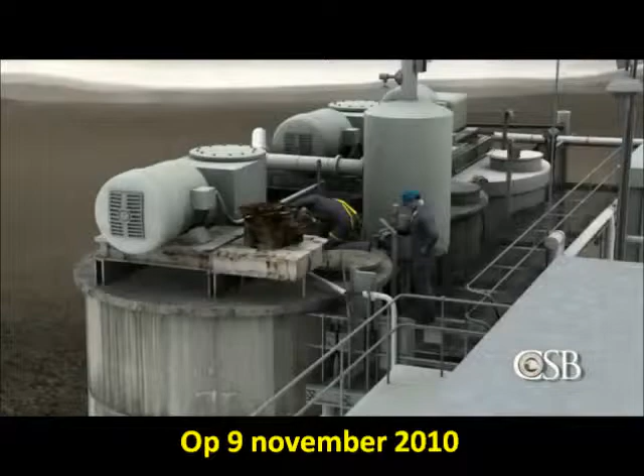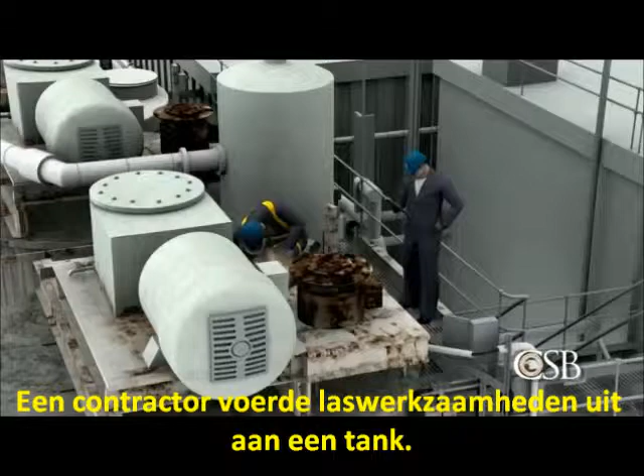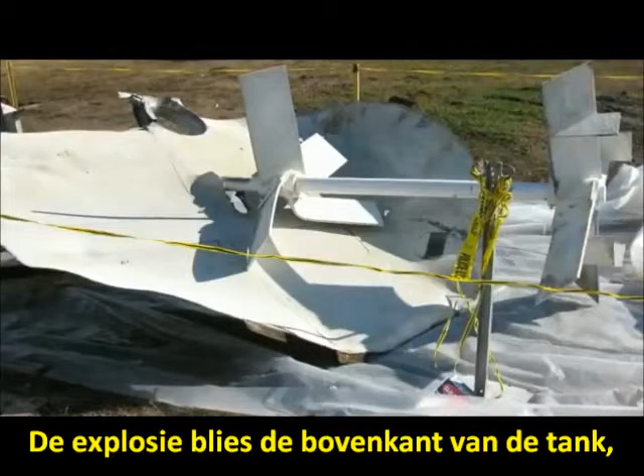On November 9, 2010, a powerful explosion shook the DuPont chemical manufacturing plant in Tonawanda, New York, a suburb of Buffalo. A contract welder was performing maintenance work on a tank that, unknown to him, contained flammable gas. The explosion blew the top off the tank, throwing the welder to the ground and killing him instantly.

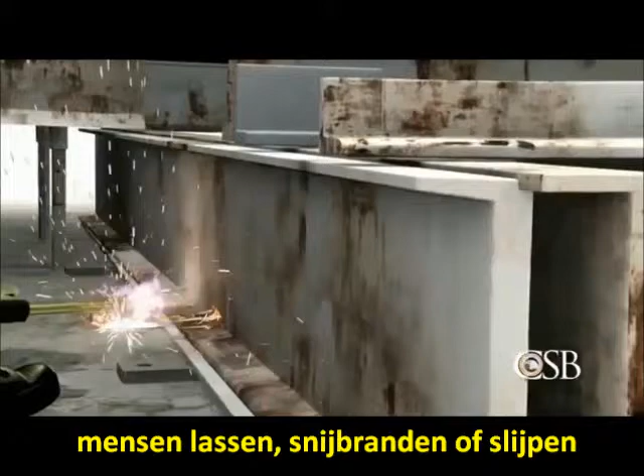A second contract worker was burned. Hot work accidents occur when workers are welding, cutting, or grinding near flammable vapor.

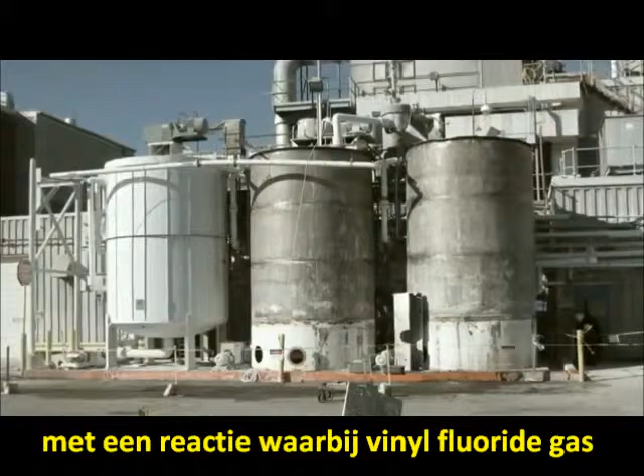DuPont's Tonawanda facility manufactures a polymer known as Tedlar, used in solar panels, and Corian for use in countertops. The process of producing Tedlar began with a chemical reaction to convert flammable vinyl fluoride gas into a slurry of polyvinyl fluoride polymer, or PVF, in water. The PVF slurry then passed through separators.

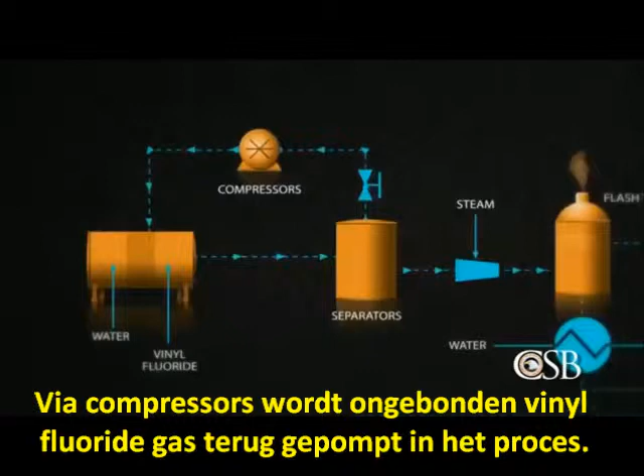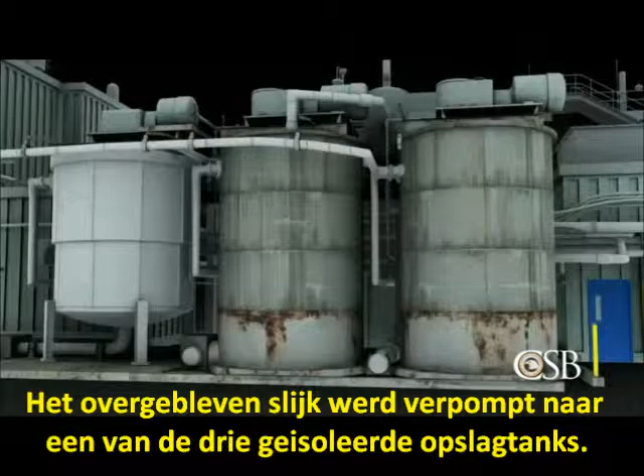Compressors recycled unreacted vinyl fluoride gas into the process, while a small flash tank released residual vinyl fluoride into the atmosphere. Finally, the slurry was transferred to one of 3 insulated holding tanks, usually tank number 3. Tanks 1 and 2 were reserved for slurry overflow. Tank 1 normally remained empty.

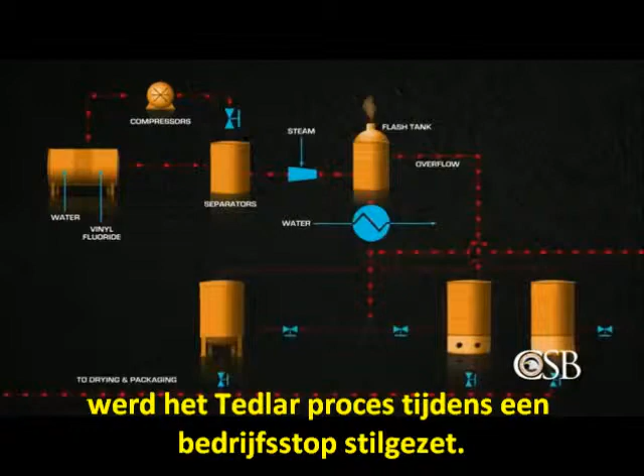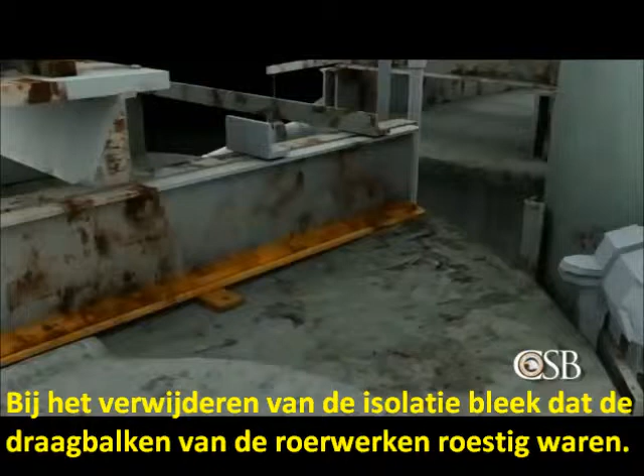On October 22, 2010, the Tedlar process underwent a planned shutdown, during which workers removed the asbestos insulation on tanks 1 and 2. Removing the insulation revealed that the agitator supports for the tanks were heavily corroded. DuPont directed contractors to repair the supports, which would involve welding and grinding on tanks 1 and 2.

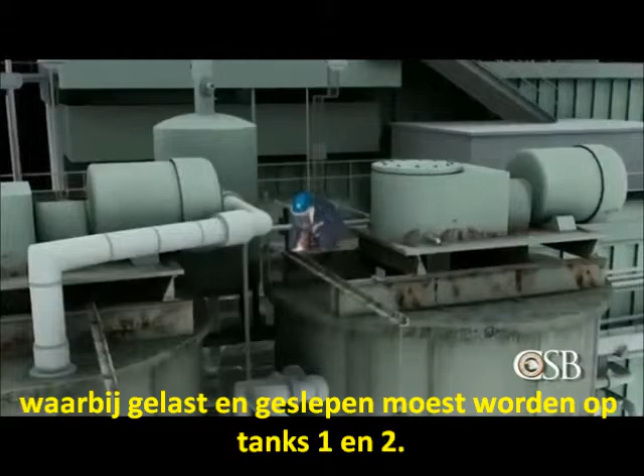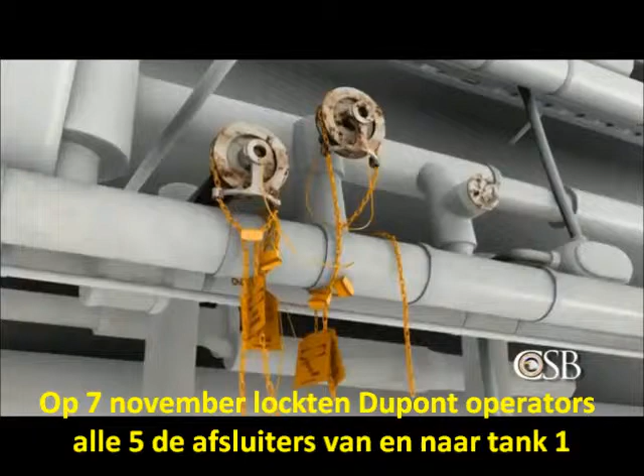The hot work on tank 2 occurred during the shutdown without incident, but the repairs on tank 1 were delayed while parts were ordered. DuPont personnel determined that it would be safe to perform hot work on tank 1 after the restart. On November 7th, DuPont operators locked all 5 valves leading to and from tank 1 in the closed position in order to stop potential slurry flow. The tank's agitator motor was also locked out.

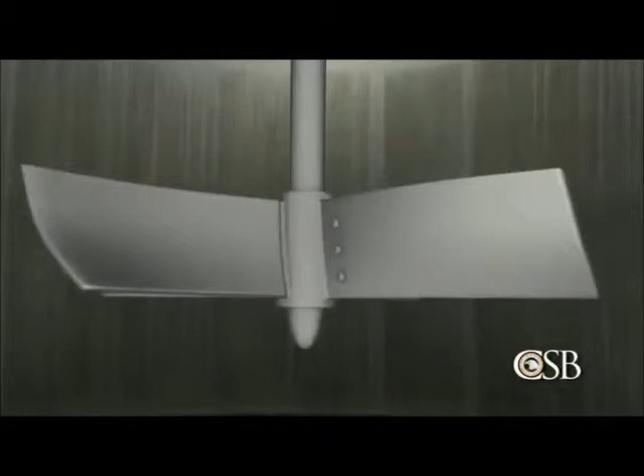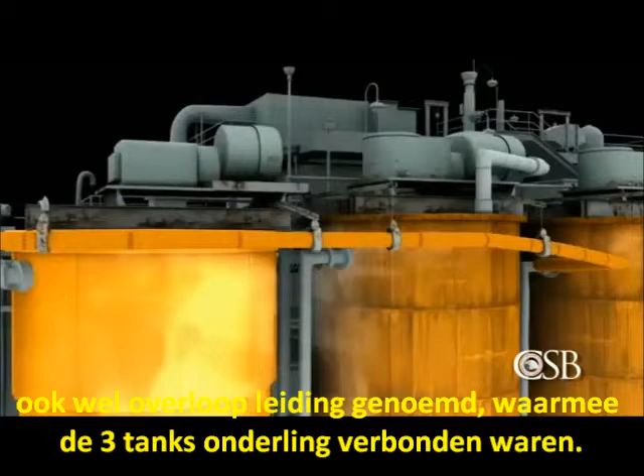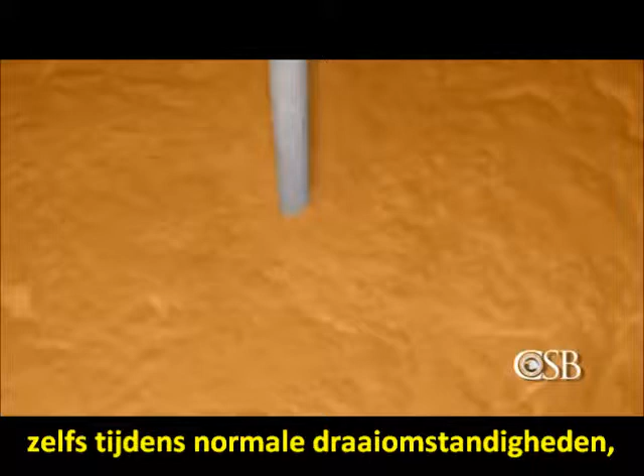However, DuPont personnel did not block the flow of gas inside the overhead piping, or overflow line, that connected the vapor space of all 3 tanks. They mistakenly believed that flammable vinyl fluoride gas could not reach any of the slurry tanks. But the CSB investigation found that even in normal operations, vinyl fluoride was not completely removed from the slurry and was always present in the slurry tanks in varying amounts.

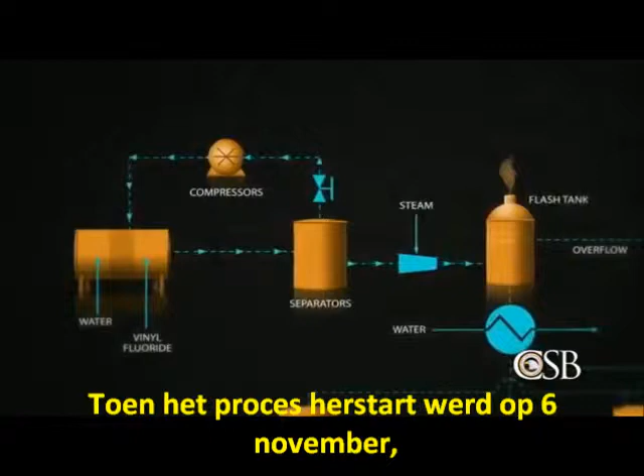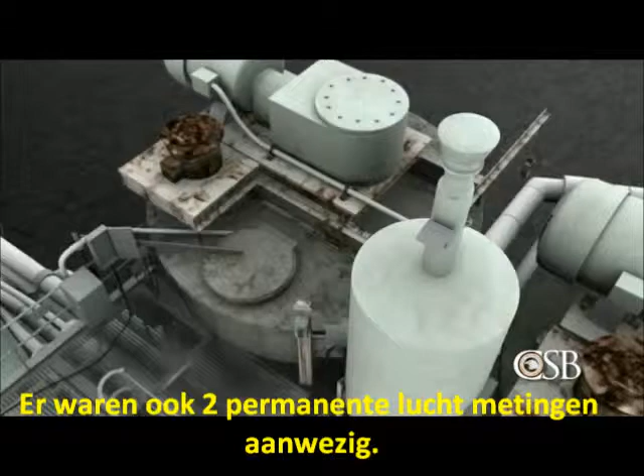When the process restarted on November 6th, the flammable gas was able to travel from tanks 2 and 3 through the open overflow line into tank 1. On the morning of November 9th, a DuPont technician tested the atmosphere above tank 1, where welding would later take place. There were also 2 continuous air monitors in the vicinity. No flammable gas was detected, and the hot work was cleared to begin.

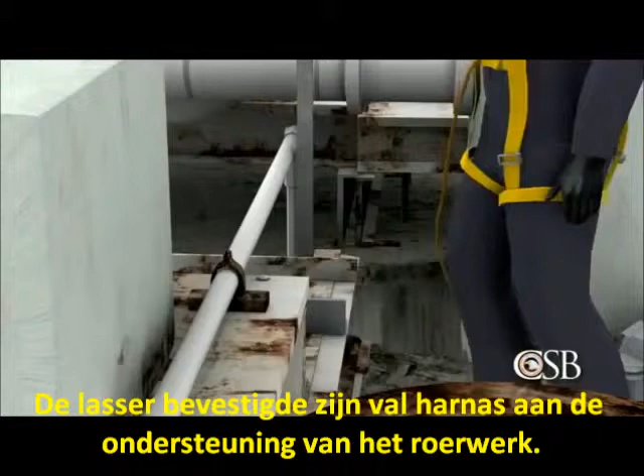But no testing was done to measure or monitor the atmosphere inside the tanks, where, unknown to the contractors, the flammable gas was at dangerous levels. Around 9 a.m., 2 contract workers began welding and grinding on tank 1. The welder connected his safety harness to the tank's agitator support and worked on top of the tank as the foreman looked on from the nearby catwalk.

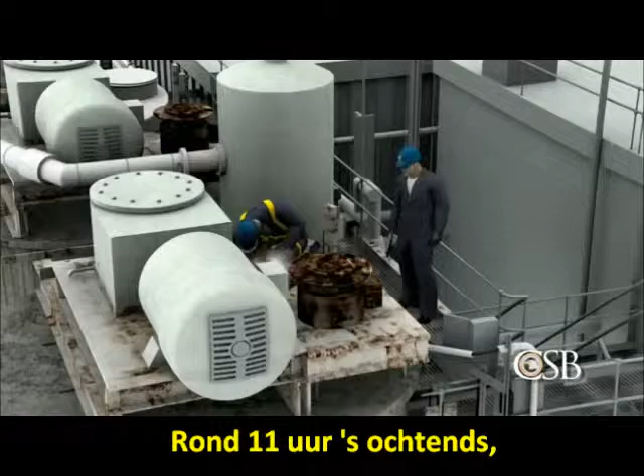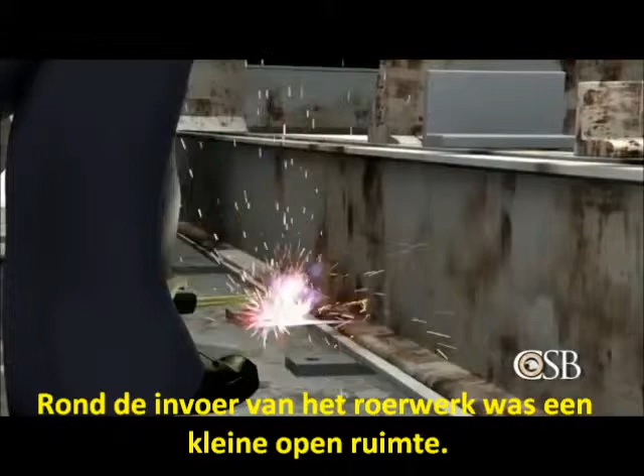At approximately 11 a.m., the welder was repairing corroded portions of the agitator support beams directly above the flammable gas. A hole around the agitator shaft may have provided a pathway for ignition. Welding sparks could fall into the tank, even as flammable gas might drift upward toward the sparks. The ignition of the vinyl fluoride caused a powerful explosion.

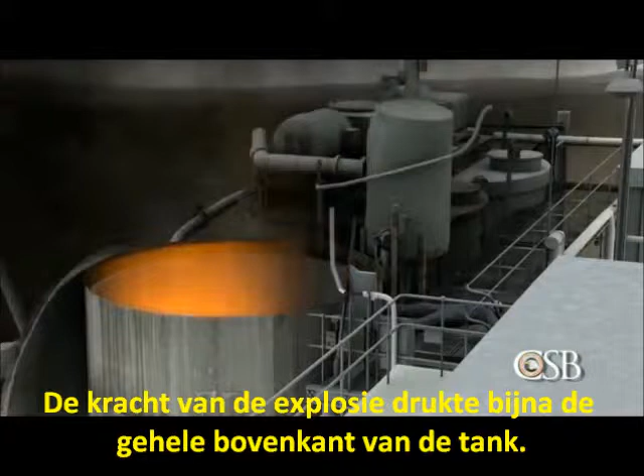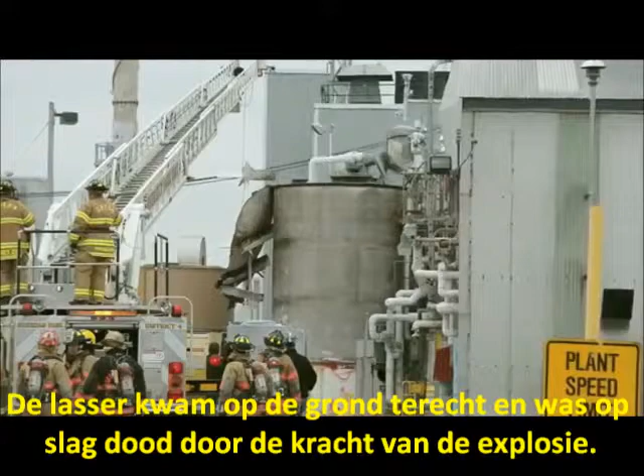The force of the blast blew the top of the tank almost completely off. A flash fire erupted that consumed the flammable gas and quickly burned out. The welder was thrown to the ground, killed instantly from blunt force trauma. The foreman's face and arms were burned.

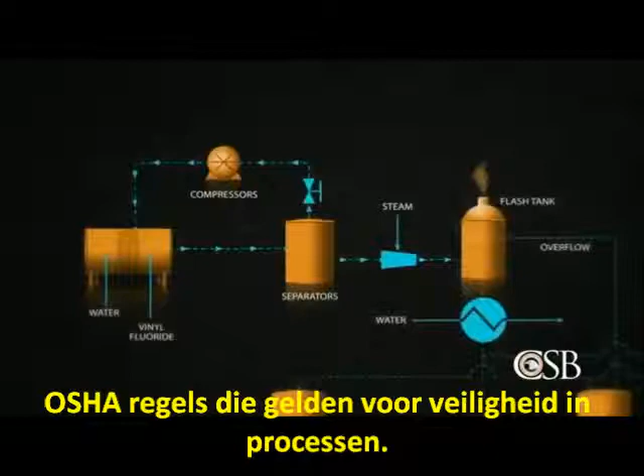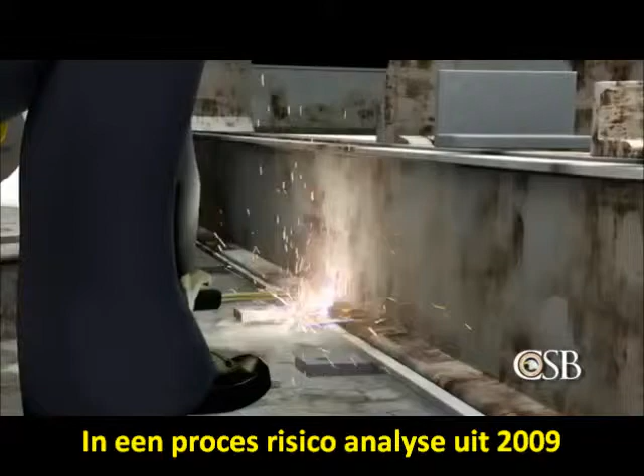DuPont regarded most of the Tedlar production process as covered under the OSHA standard for Process Safety Management, or PSM, and therefore subject to stricter operating and maintenance requirements. But DuPont personnel did not include the slurry tanks in the facility's PSM program. In a 2009 process hazard analysis, DuPont erroneously concluded that flammable vinyl fluoride gas could never reach the tanks in dangerous quantities.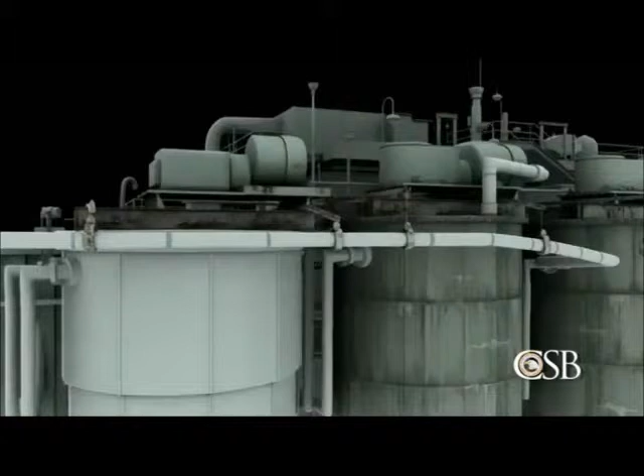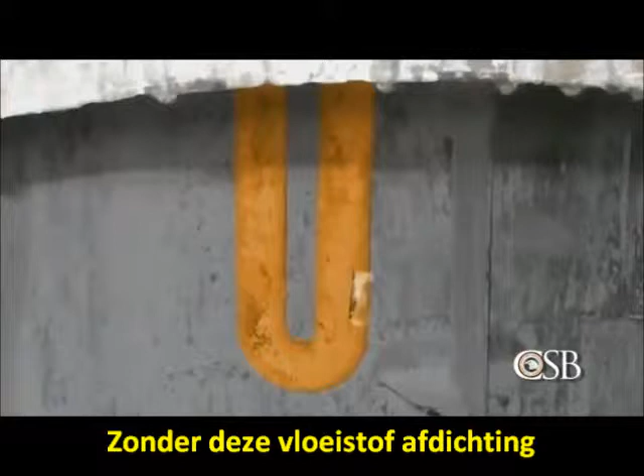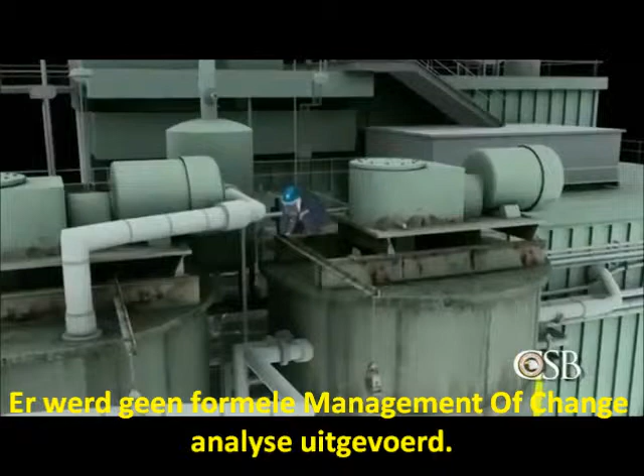Two additional factors may have contributed to the tragedy. Prior to the explosion, DuPont personnel had discovered that slurry tank number 2 had a hole in a liquid trap, which was designed to prevent the flow of gas from the flash tank. Without a liquid seal in the trap, there was an additional pathway for vinyl fluoride gas to flow into the tanks. However, this hazard went unrecognized, and DuPont engineers concluded that it would be safe to return the tank to service. No formal management of change review was conducted.

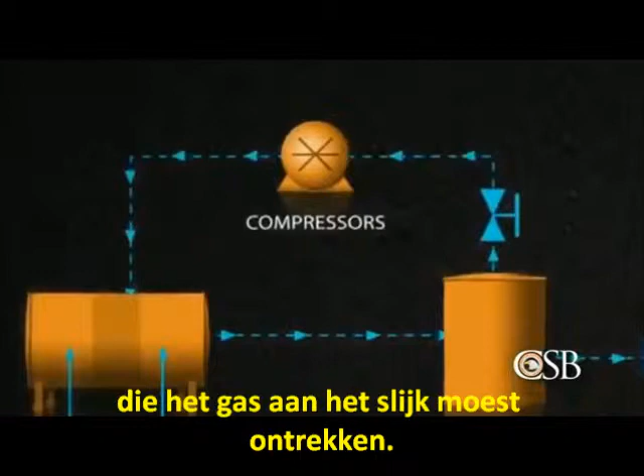Further adding to the danger, on November 8th, there was a malfunction in a compressor used to strip vinyl fluoride gas from the PVF slurry. As a result, the slurry contained more than the normal amount of vinyl fluoride. Once again, DuPont personnel did not formally analyze the safety impact of continuing to operate with a malfunctioning compressor.

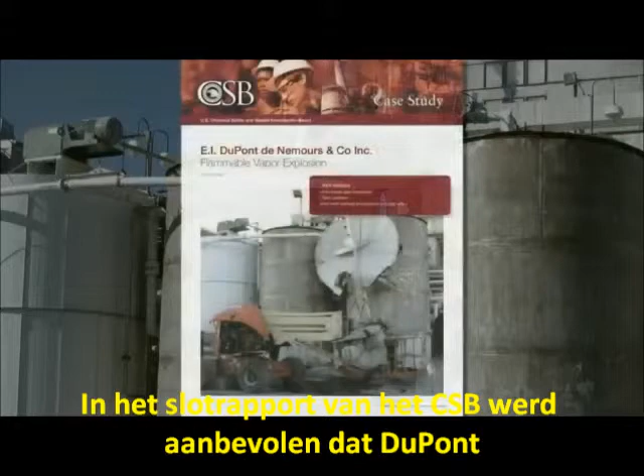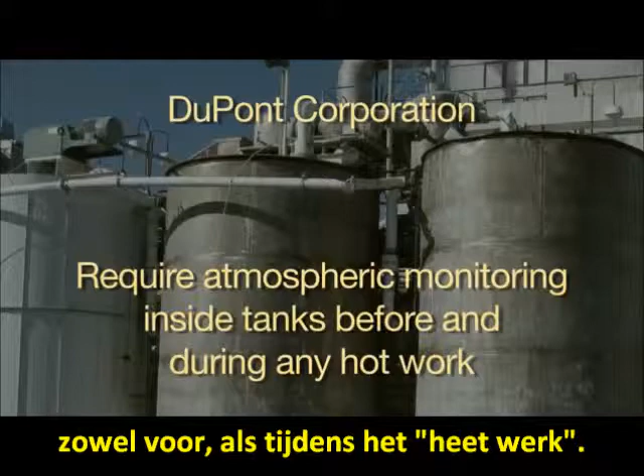In its final report, the CSB recommended that DuPont revise its corporate policies to require atmospheric monitoring inside tanks before and during any hot work. And the board recommended that DuPont require all process piping, including vent lines on tanks, to be positively isolated before authorizing any hot work.